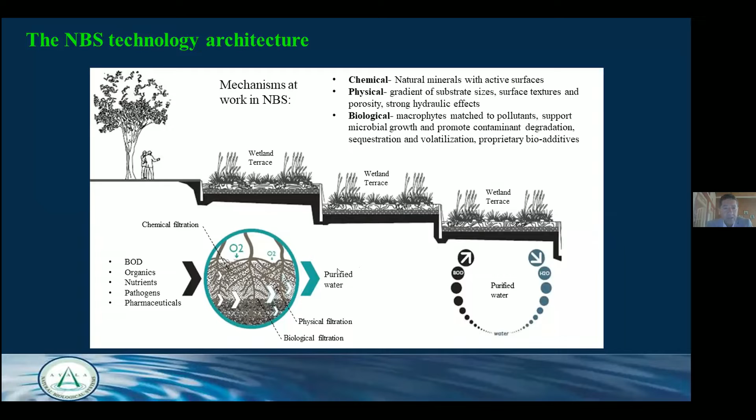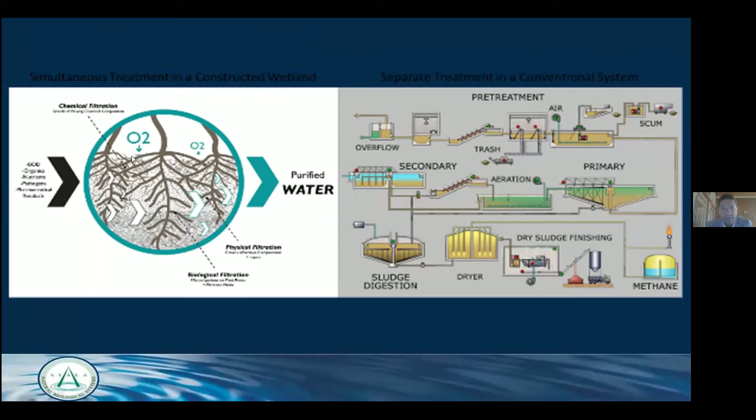Over here you can see this picture that says everything. See this one against this one. This is the conventional one - you have one stage after another, many stages of physical, chemical, and biological happening one after another, needing a lot of machinery, a lot of energy. In our system, it's happening all together at one time, which sounds like a miracle, but it is.

Nature is a miracle, and actually, we're mimicking nature in an engineered way, and we're doing it in a very efficient way. If you think about it, this is the only way to actually reverse climate change. Because the problem today is that we're consuming too much, using too much energy, and we're using too many rich, energy-demanding technologies to solve our problems.

So we solve one problem, but we create two others that are much harder to solve. This nature-based solution is completely independent and does the job for the long run, completely in a sustainable way, and gets better through time.

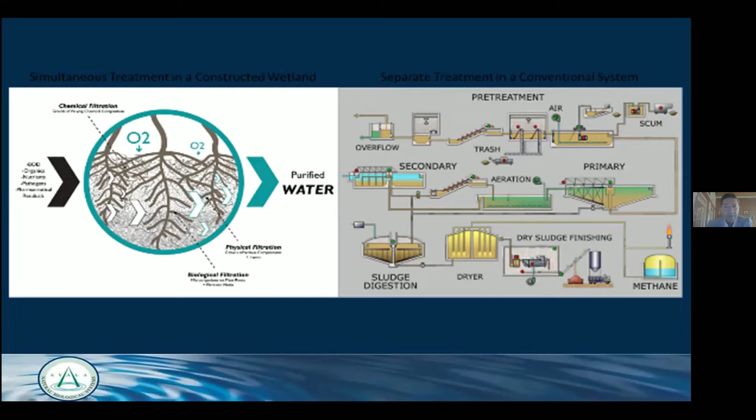But it's more than that. It's more than just treating water. It's also about harvesting rainwater, treating it, and then recharging the aquifer. We believe that if you harvest rainwater, you need to treat it beforehand, because if you recharge the aquifer with dirty water, you kill it instead of helping it.

It's also about enlarging the green area, and of course you regain the balance to nature which we lost. Today we all know that the main cause for climate change is too much use of energy on one hand, and on the other hand the destruction of green cover worldwide.

By using this intense and dense green system, we're actually creating very powerful kidneys and lungs, natural lungs, that do the job for us in a very efficient way. And of course, it's beautiful. People like it. People don't have any nuisance, no smell, no noise.

So actually it's part of our life. We call it the active landscape. You can implement it inside a city, beside your living area, and live and spend time on it without even knowing this is actually a purification system. I'll talk about the cost in a minute.

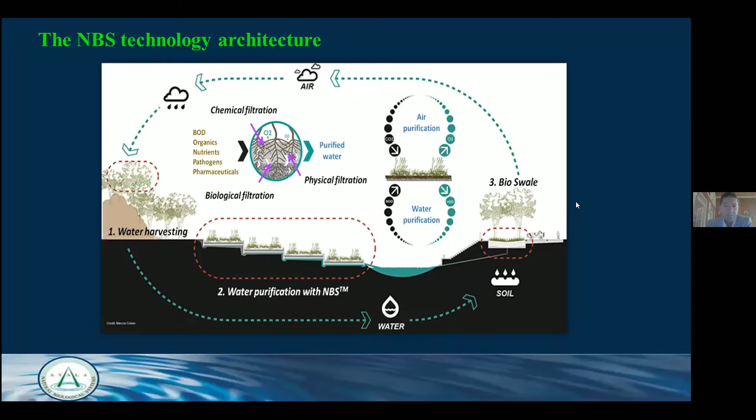Over here you can see some examples of different gravels, different layouts of hydrology regimes. The plants - you can see the plant roots, the root zone of plants, aquatic plants. Look how dense it is. These aquatic plant root zones support huge communities of microorganisms that are doing very powerful work.

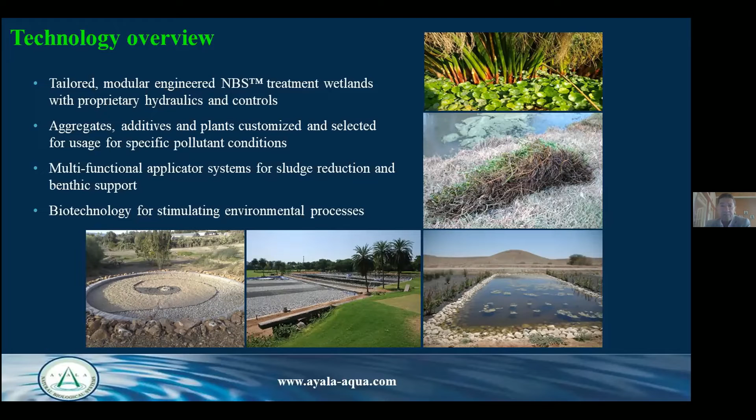And it's working, and getting better through time, because the plants specialize. When a similar sewage comes in, they get specialized and can treat much more sewage after a while. I want to show you some case studies that have been done in Israel and in India.

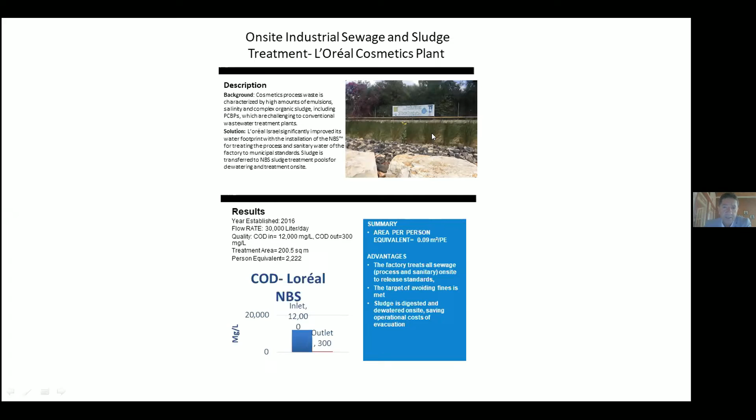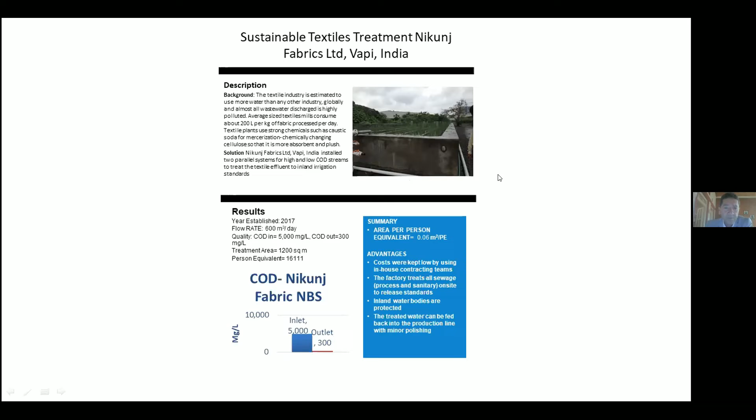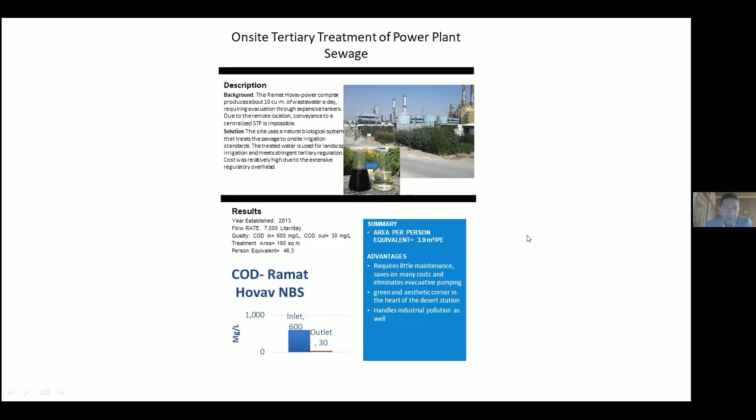And this is what we call the on-site decentralized nature-based solution. When you talk about decentralized, it's important to keep in mind that if you do a system on-site decentralized, you can skip the conveyance and pumping system, which is a huge saving beyond the system itself, less energy and less cost. I don't know how much you know about the costing of piping, etc., but sometimes it's even impossible to run pipes in dense cities. So this is a solution that can be implemented inside the city as part of the park, part of the landscape, part of the green areas. We always find a place, and then it can be used for whatever we want.

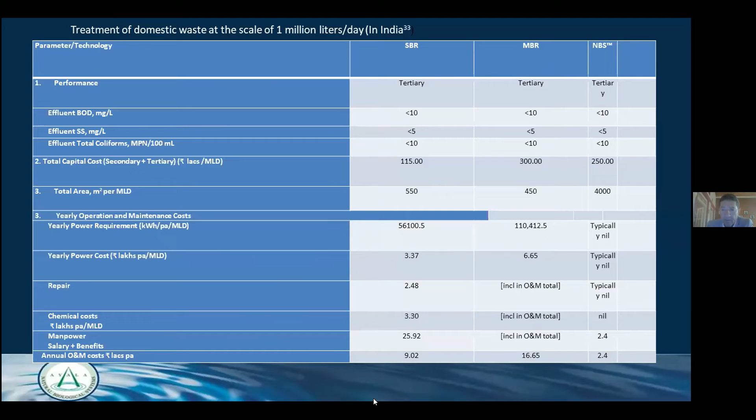This is the total cost of ownership. You can see that because of the low O&M, the gap keeps growing. The gap in capital might be small in the beginning, but the overall cost over 10 years, 20 years is huge. I also have to take into account the infrastructure, changing electro-machinery, infrastructure, etc., and we don't have it. It's just working as it is and getting better through time.

I know that it sounds like a miracle to some people, and I know it sounds unreasonable because we were taught that only machinery or technology can give a solution. But here we can see that if we avoid technology in the right places, we can achieve more with much less.

By the way, I didn't mention it, but the quality of water coming out from these systems is amazing in all parameters. It's not only about organics and nutrients, it's also about heavy metals, hormones, and many other elements that we reduce, because there is no vacuum in nature. When you have any kind of contaminant in the system, it will be treated, eaten, or used by some communities of microorganisms that will deal with it.

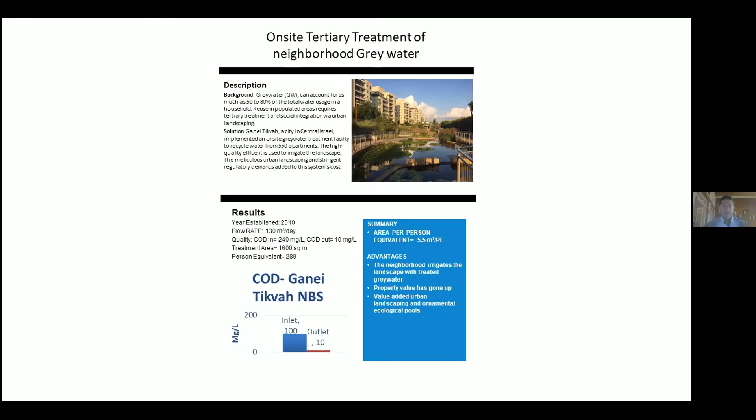Thank you very much, Mr. Ali. We have another question from Mr. Pratik's side: does the wetland have a shelf life? Let's say once the plants have accumulated and absorbed the metals and other pollutants, what happens afterwards?

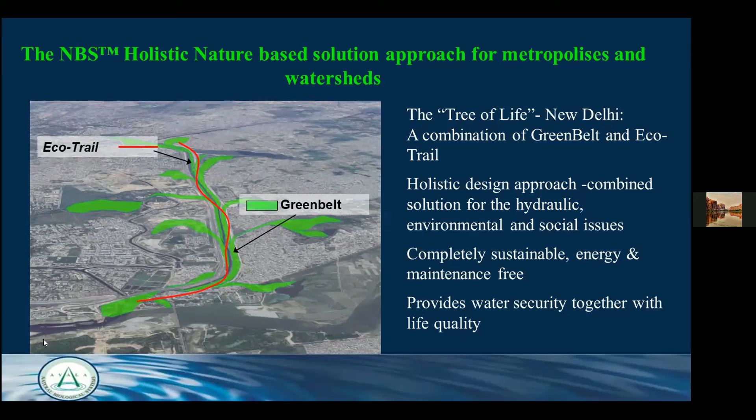See, what most of the contaminations do is break down into oxygen, CO2, organic matter, etc., and get used by the plants. So not much is left. Only if there are pure minerals getting into the system that aren't used by the plants, they might remain. But most contaminants are being used, including heavy metals.

So we don't really need to clean it. What happens is the plants grow and accumulate and suck whatever into the root zone, and then into the plants themselves, and it grows into the plant. Theoretically, you don't really need to touch it - it's like a natural wetland. It can live for generations if you do it right. The only limit might be the sealing material you use, etc. But basically there's no limitation, and it can have a long life.

And you don't change any plants, by the way. You're not changing any plants.